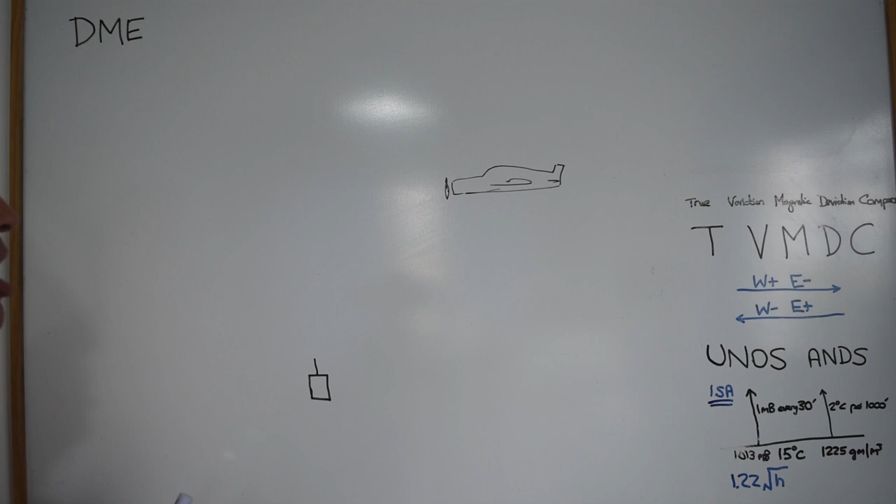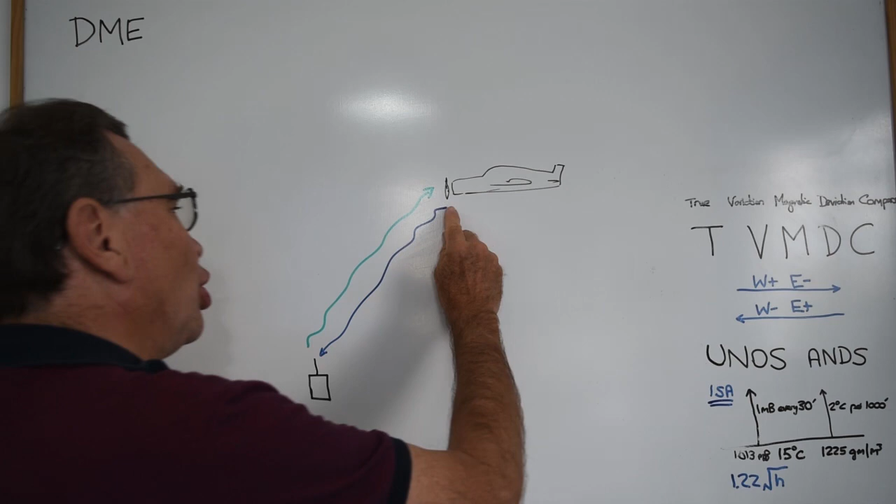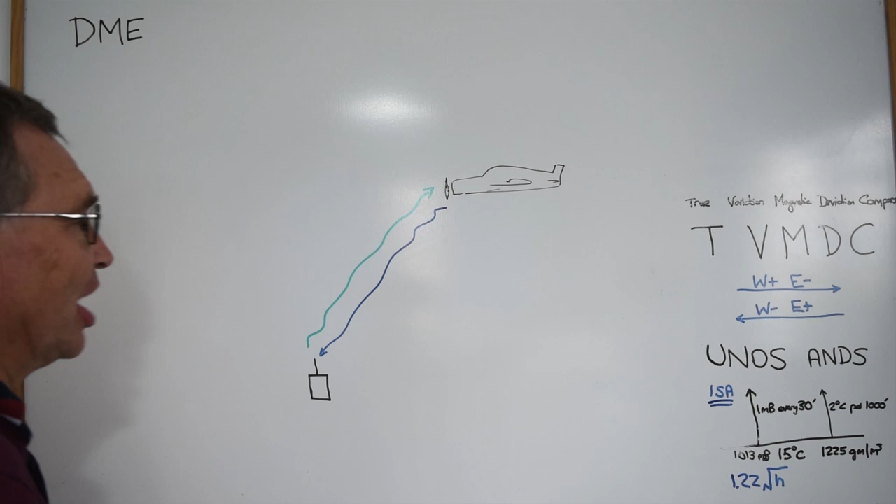So what we basically have is our aeroplane with some sort of ground station. The aircraft transmits a pulse to the ground station that the ground station receives, and it sends back a corresponding pulse to the aircraft. Depending on how long it took for this to go all the way to here and all the way back, we can then work out with the box of electronics in the plane how far away the plane is from this aerial.

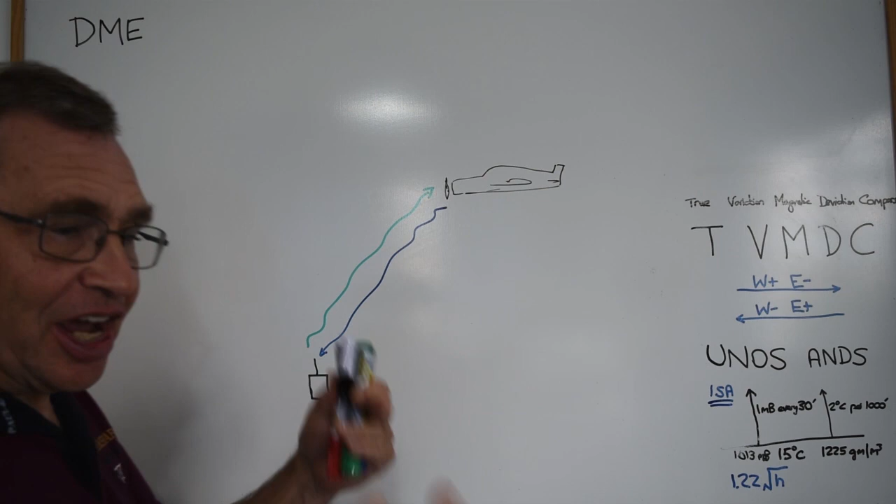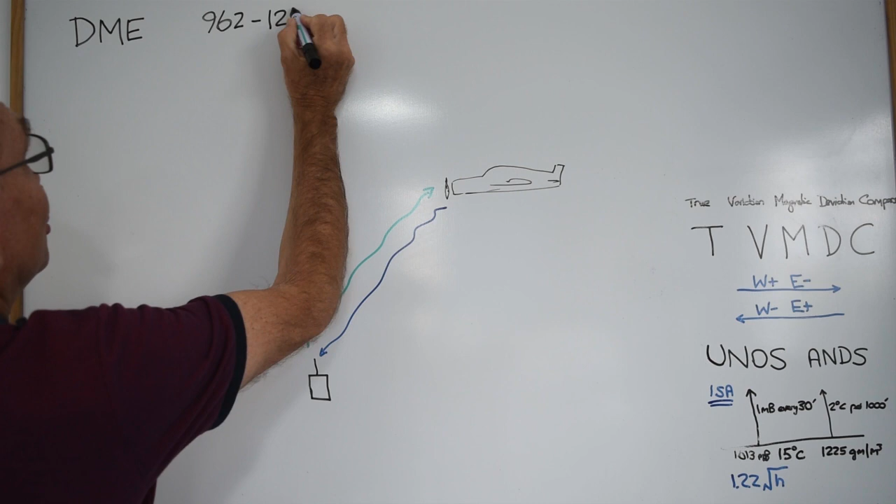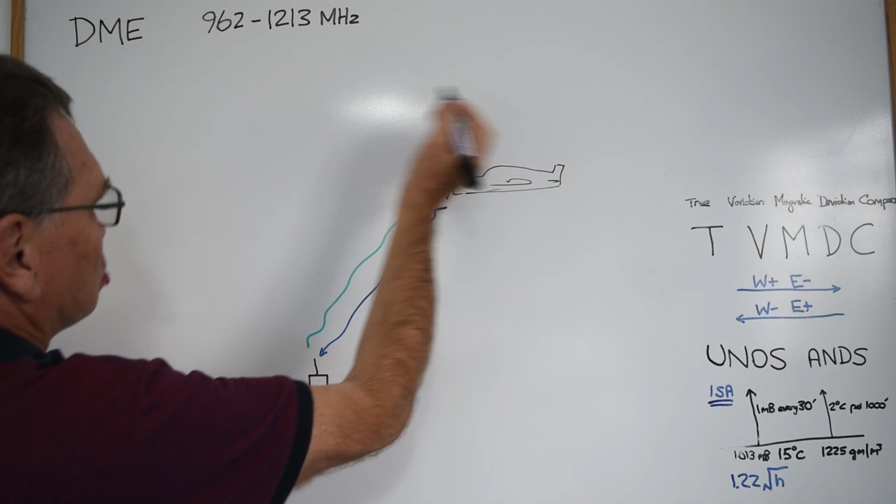Now, DME works in the UHF band, not the VHF band. The UHF is the next one above VHF, and it works in the range of 962 to 1213 megahertz with 1 megahertz spacing. That gives about 250 frequencies available.

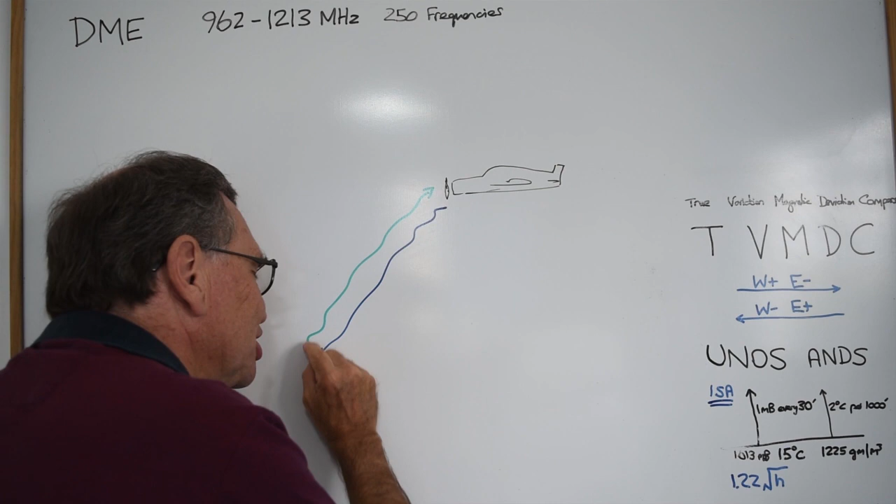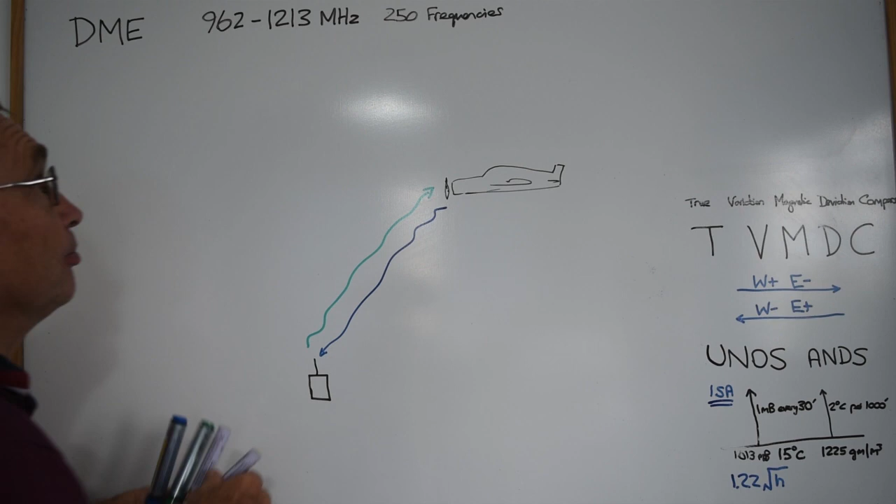Now the signal coming down and the signal going back up are on two different frequencies. So of this 250 frequencies, we've actually got 126 channels available to us, because each channel uses two frequencies.

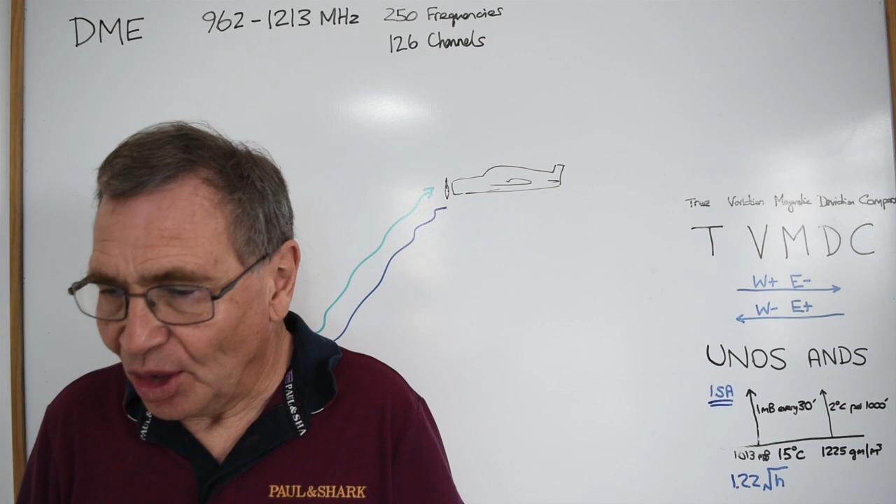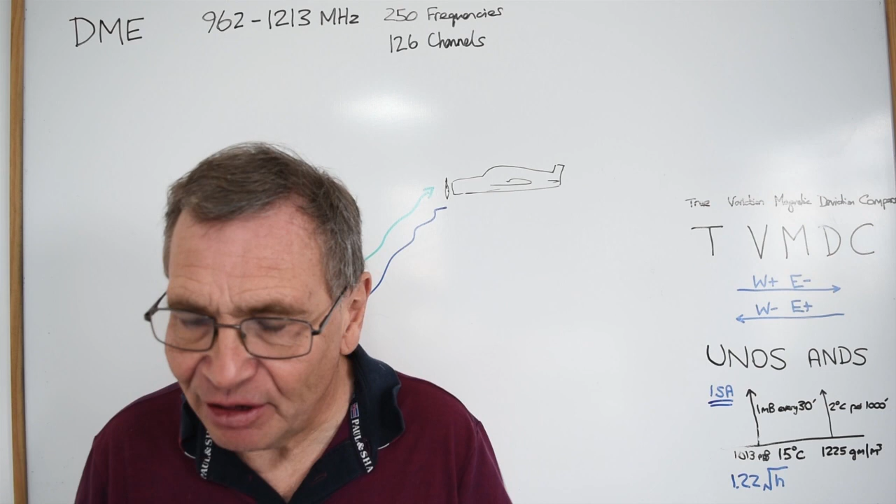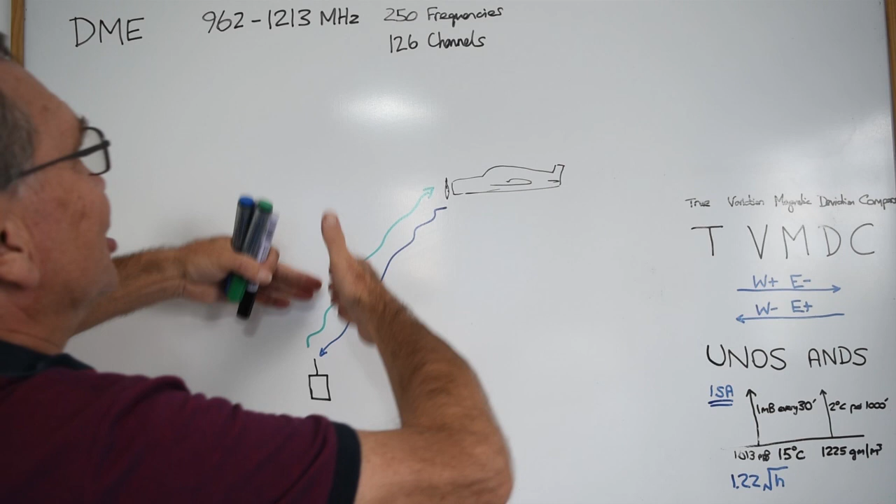Now, the great thing is that we don't need to know what all of these channels and frequencies are, because they're paired with VOR frequencies, because all DMEs are generally co-located with a VOR station. So by selecting the VOR frequency in your VOR receiver, we automatically select the appropriate DME channel, and the DME channel, of course, knows which of the two frequencies it's going to use. So this is really, really nice and simple from an aviation perspective.

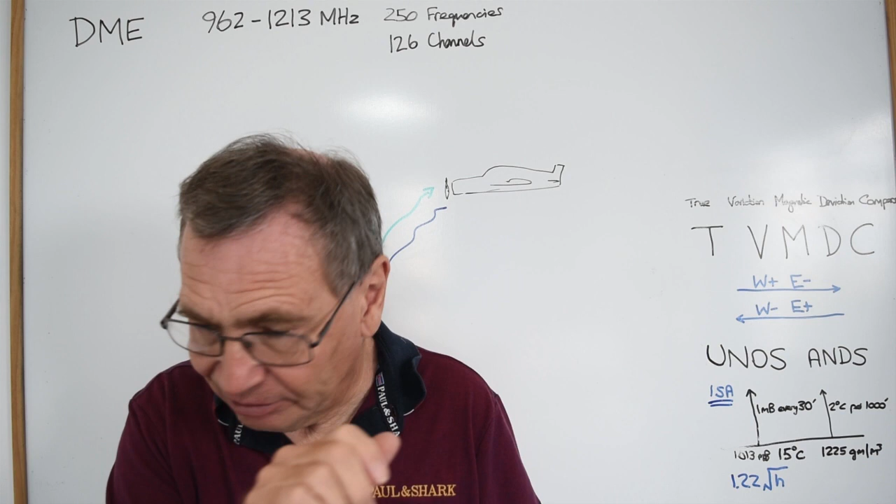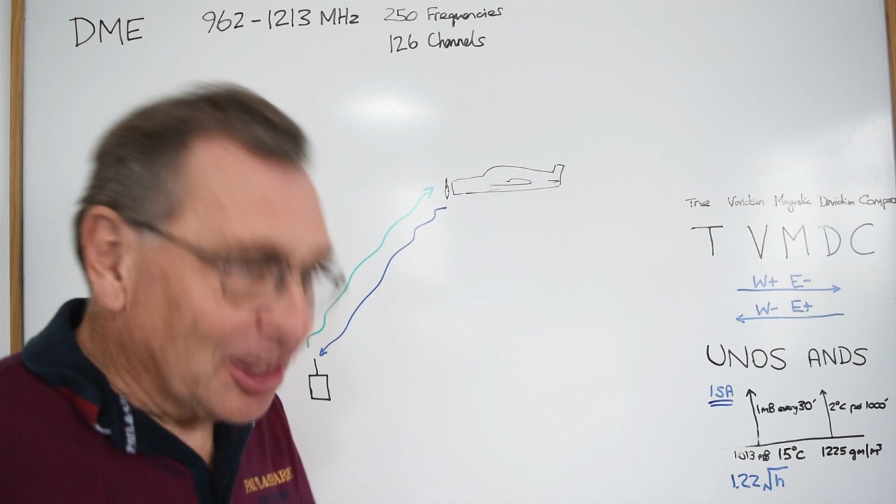But don't forget that when we're selecting the VOR frequency, although we're selecting the DME frequency, that isn't the frequency the DME operates off. The DME has its own unique set of frequencies in the UHF waveband.

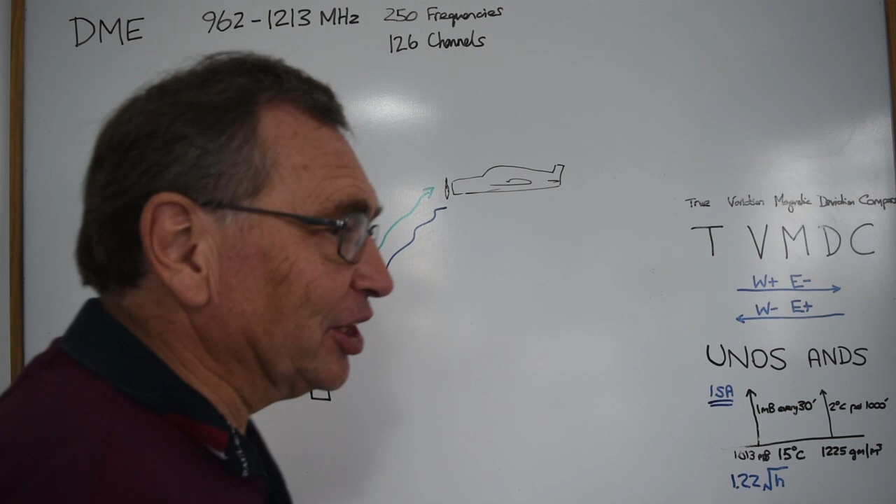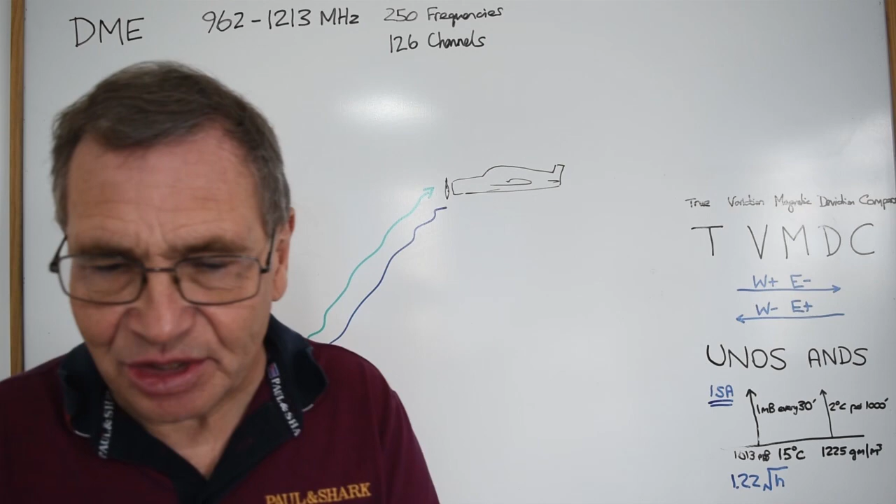Now, the other thing to not be confused about is that anything that receives a radio signal and sends a signal back is called a transponder. So DME is working around a transponder. But although this is working exactly the same as the SSR radar transponder, in that it receives a pulse and sends out another pulse, this transponder, although it's called a transponder, is working in a completely different way to the radar transponder, although it's basically doing the same job. So when you hear of DME transponder, it is a different type of transponder to the SSR transponder that we're all familiar with.

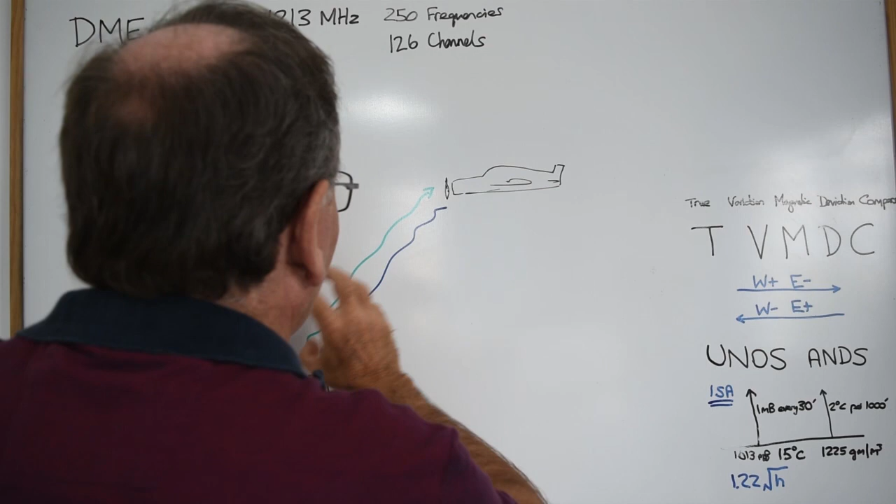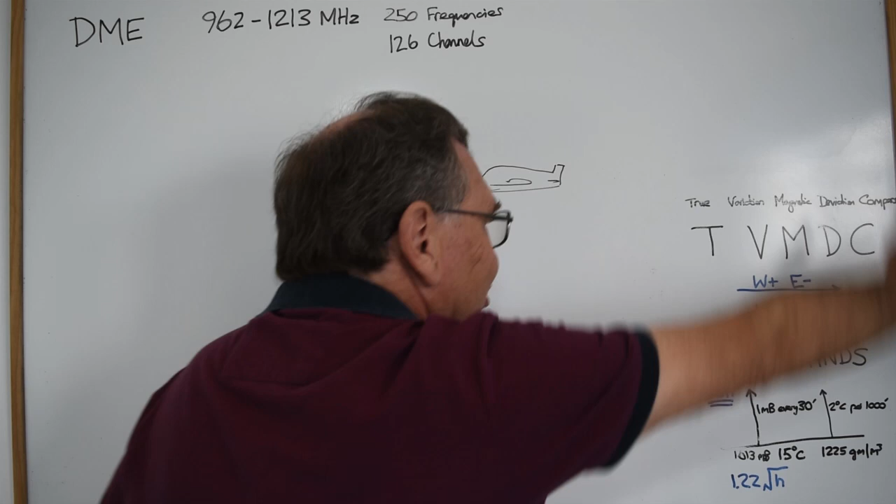So a few technical things: you could probably imagine this scenario where we've got many planes operating. They're all sending out these interrogation pulses - I need to know how far away I am - and the DME transponder sends out another pulse as soon as it gets this one. You can then measure the time it takes. But you've probably already spotted the flaw in the design, in that it can't be quite that straightforward, because when we send out this return pulse, all the aircraft using this same DME are all going to get the same return pulse, and they'll get all these return pulses mixed up. So life is not quite this straightforward.

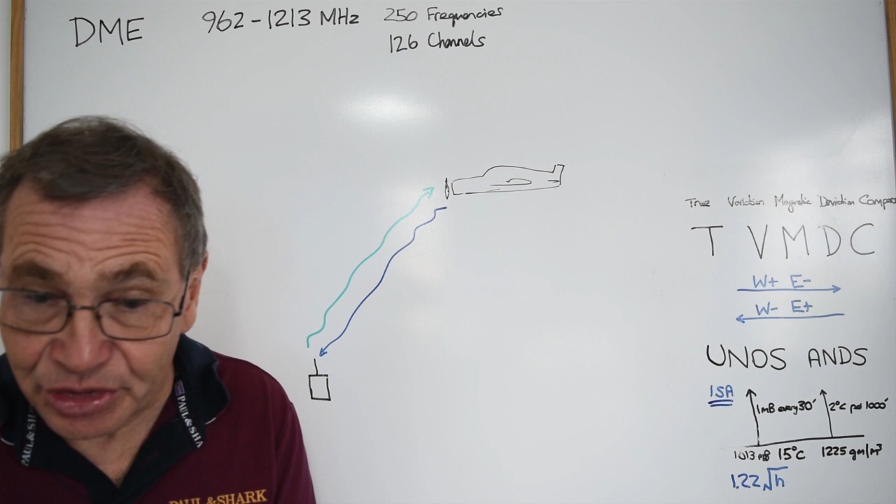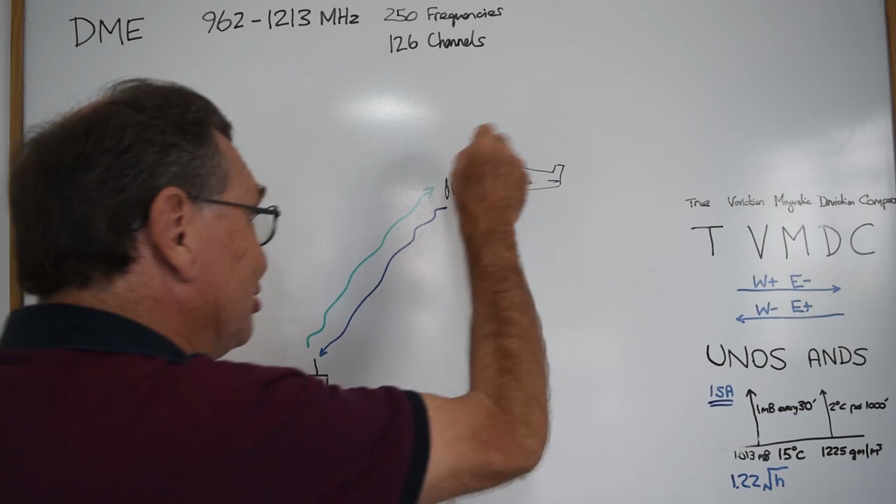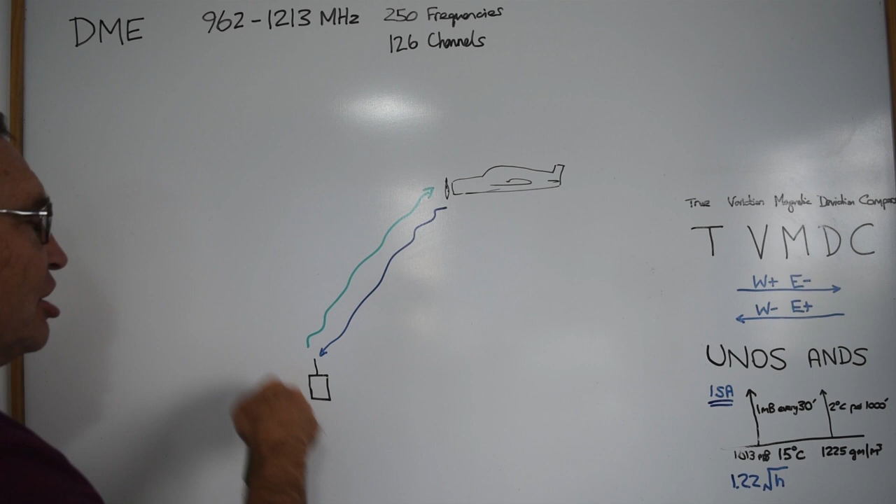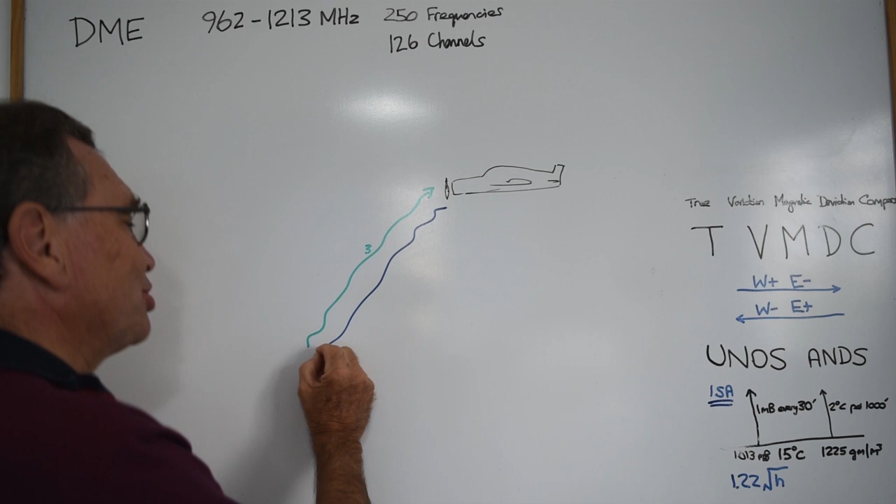What actually happens is that the aircraft initially communicates with the DME by sending out a signal that says, hi, I want to use you. The DME processes this information and says, okay, you are plane number 3, or whatever. Once it's been assigned its own unique number, the plane says, okay, I'm plane number 3, and the transponder replies back with, okay, plane number 3, here's your pulse back. So each aircraft is allocated its unique number, and each aircraft has its own unique interrogating pulse and its own unique return pulse, so they don't all get mixed up.

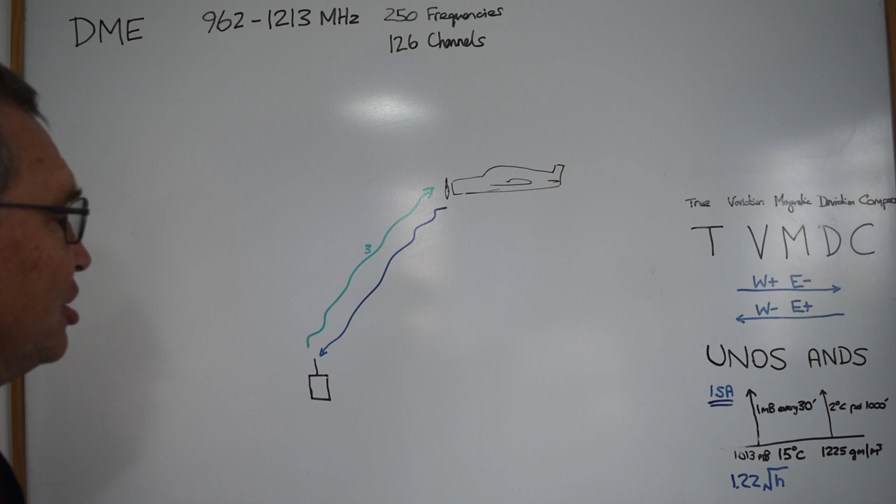Each DME can handle about 100 aircraft before they become what's called saturated. In other words, there's a finite number of aircraft that they can physically reply back to.

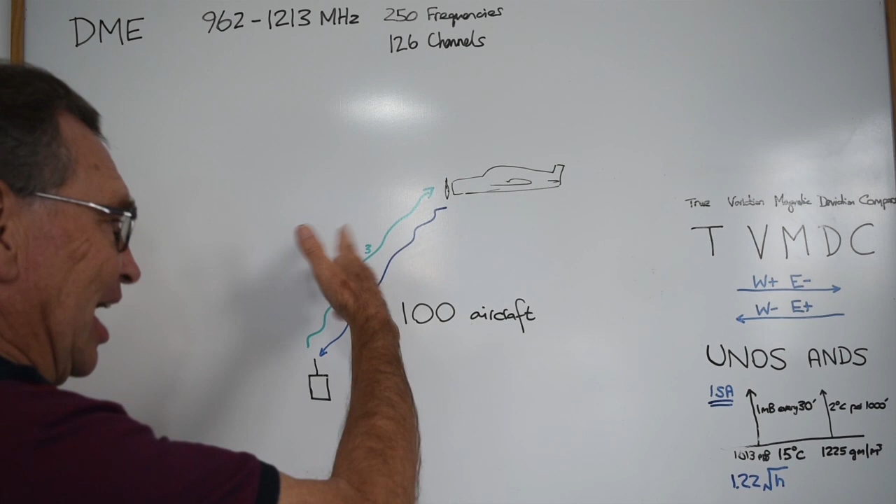And the way they choose these 100 aircraft is very simple. They just work on the fact of the 100 strongest signals that they're receiving from the aircraft. So if it's approaching saturation and another plane comes along that happens to be closer or higher or in better range of the ground station, the ground station will throw you off and allocate your number to somebody else.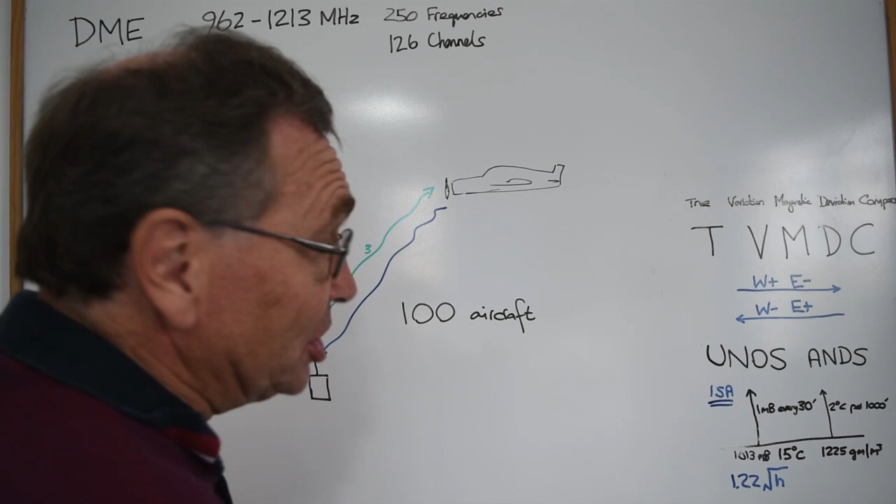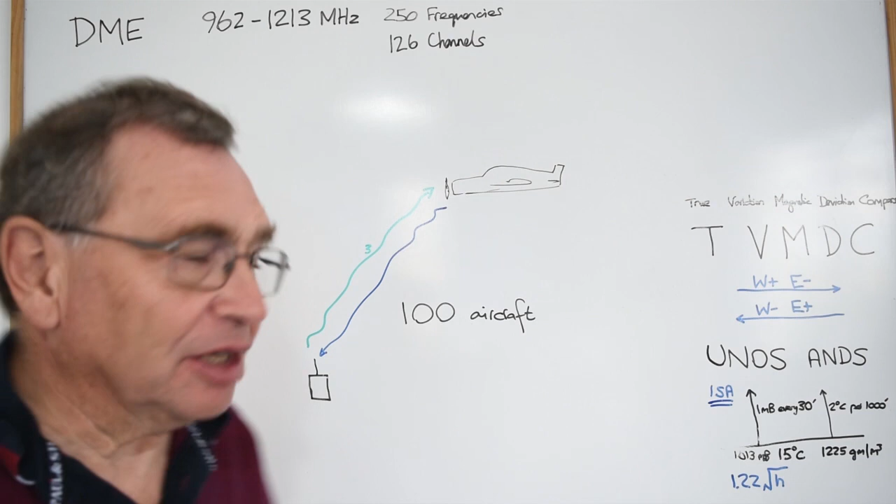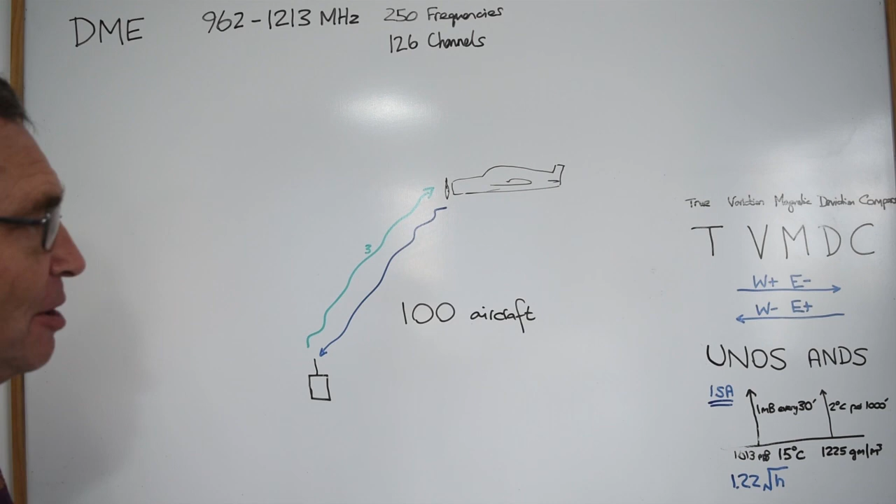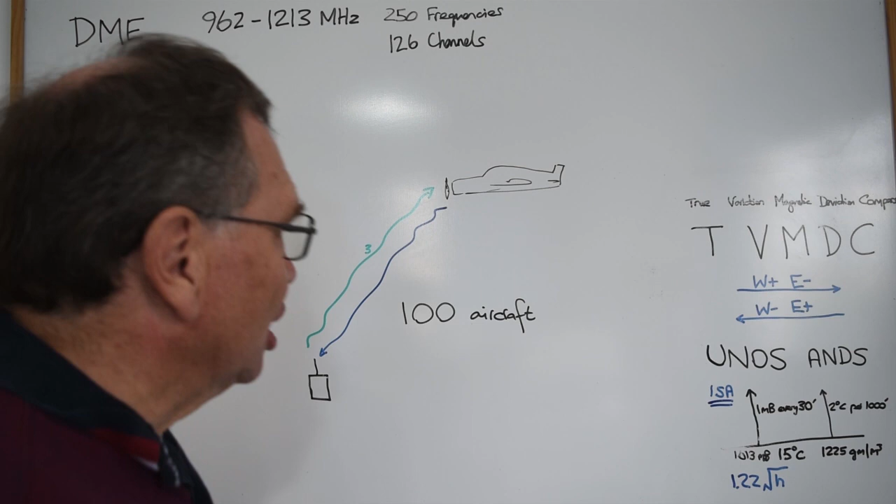Now, probably about 20 or 25 years ago, there were quite a few DMEs in the UK that were actually saturated. The London DME was extremely oversaturated, and anything more than about 20 miles away from the London DME, you couldn't actually use it, just because it was completely saturated. But nowadays, because a lot of people have switched to GPS, there isn't this same DME requirement, and I've never come across scenarios in recent history where you've got this saturation of DMEs and can't actually use them.

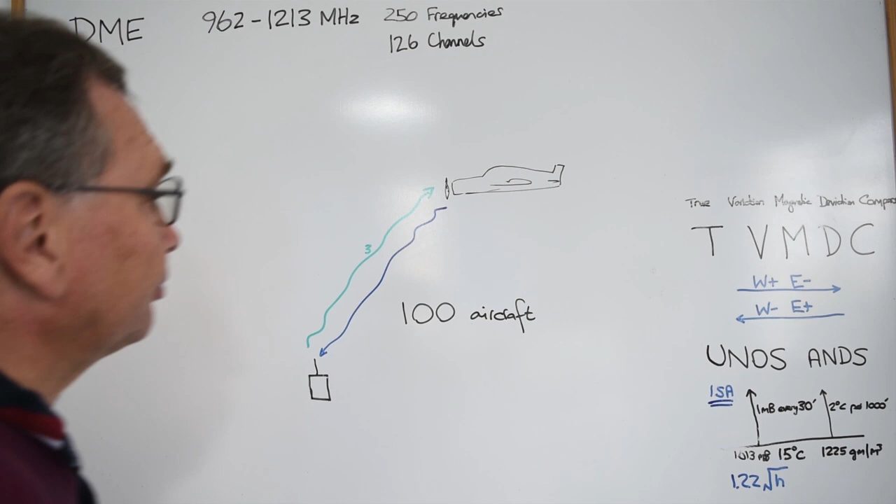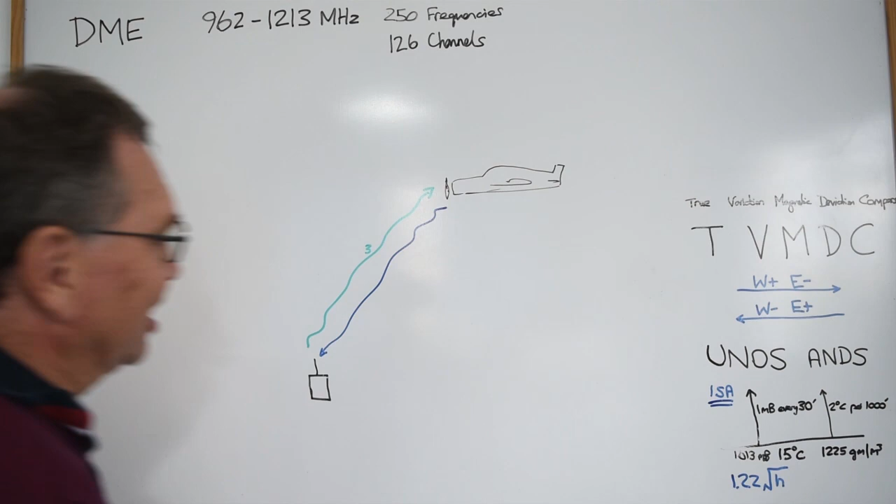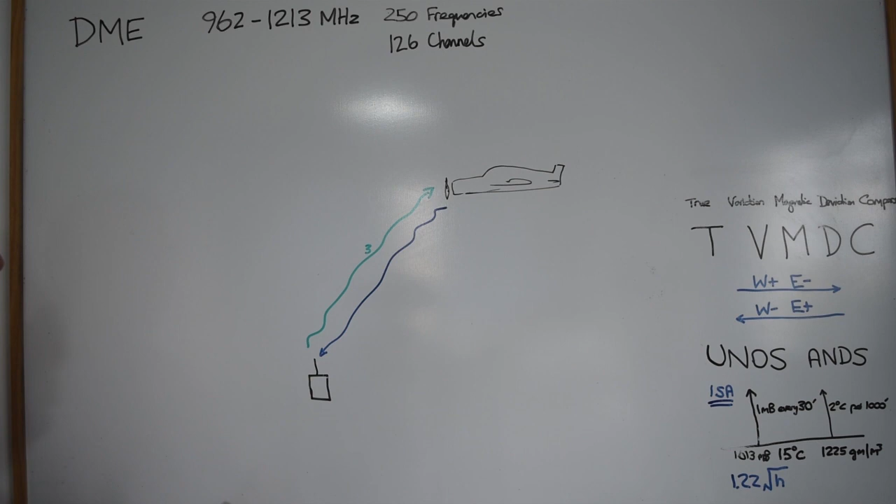So one of the things to notice is that the DME is not actually telling you how far away ground-wise you are from the station, because you're sending this pulse and it's sending you this pulse back. So what you finish up with is the distance you are away from the actual aerial of the station, your aerial from its aerial, and we call this the slant distance.

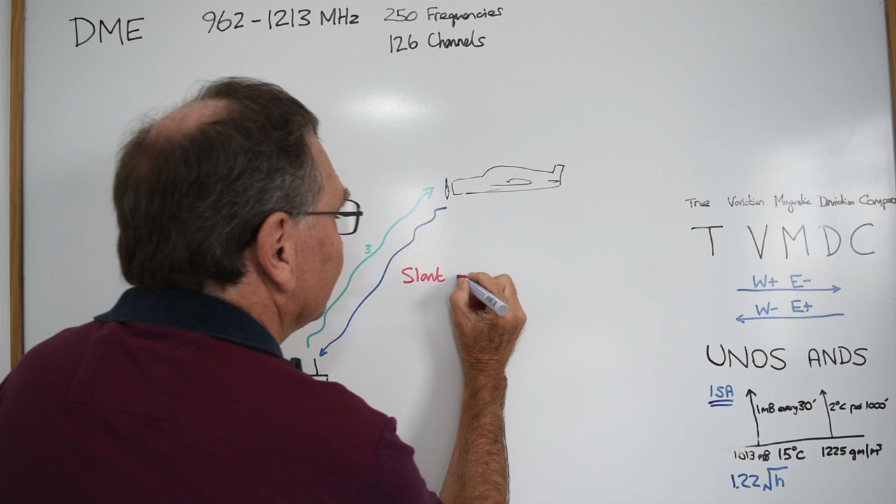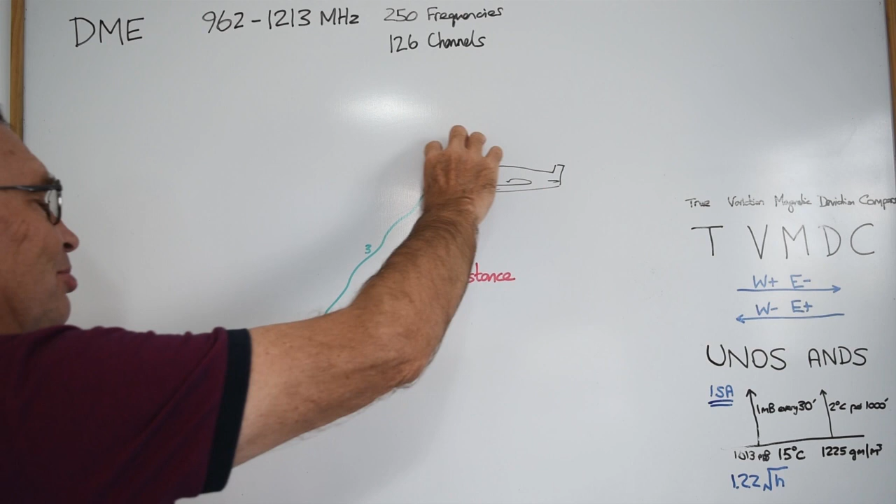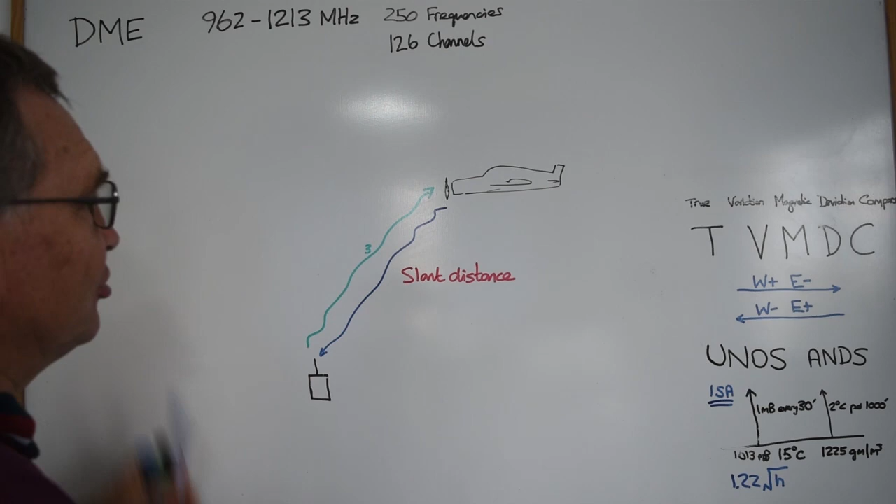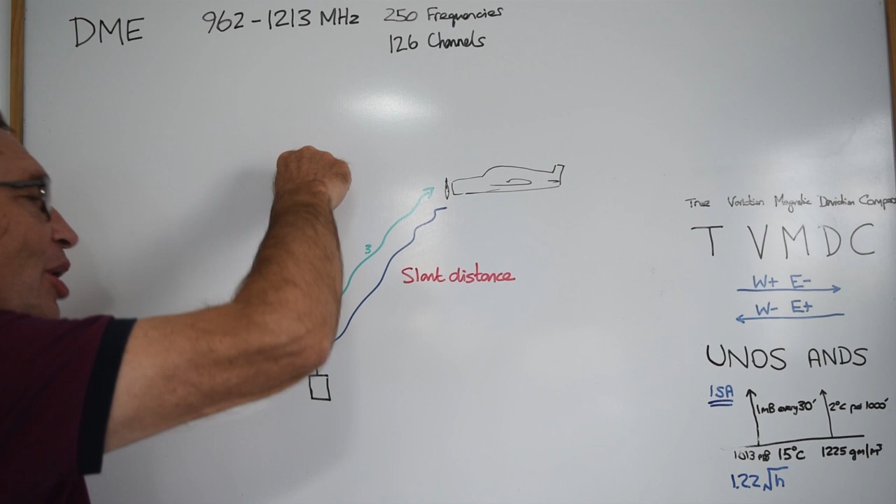So even if you fly straight over the top of the DME and you're right here over the top of the DME station, and you're sort of like 5,000 to 6,000 feet above it, and you're right on top of it, well, you're still actually a nautical mile away, aren't you? Because you're still, you know, even when you're actually directly above it, you're still 1 nautical mile away, because you're 1 nautical mile in the air.

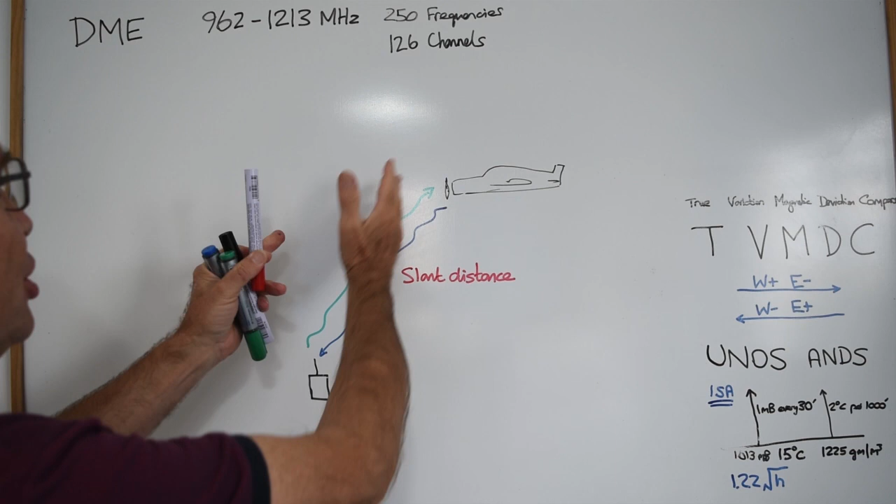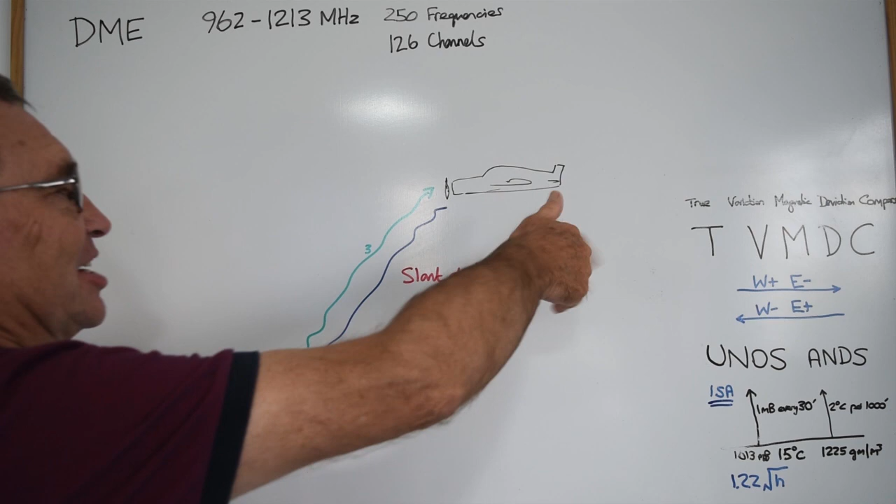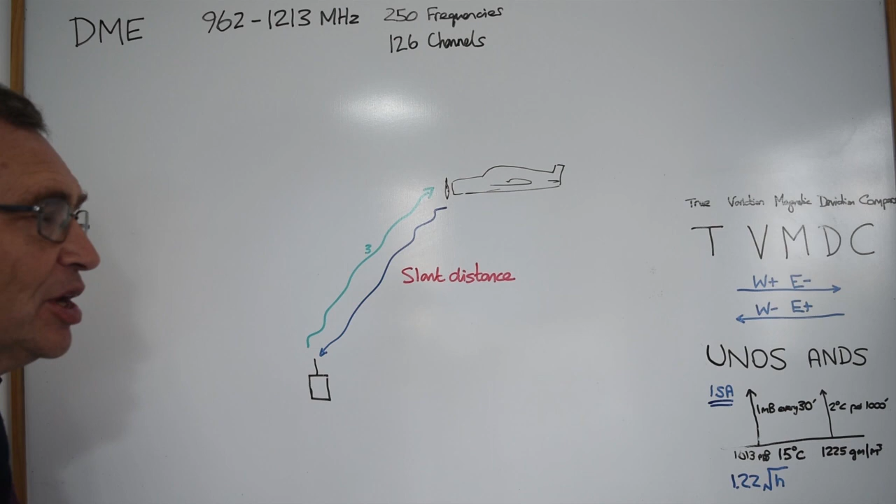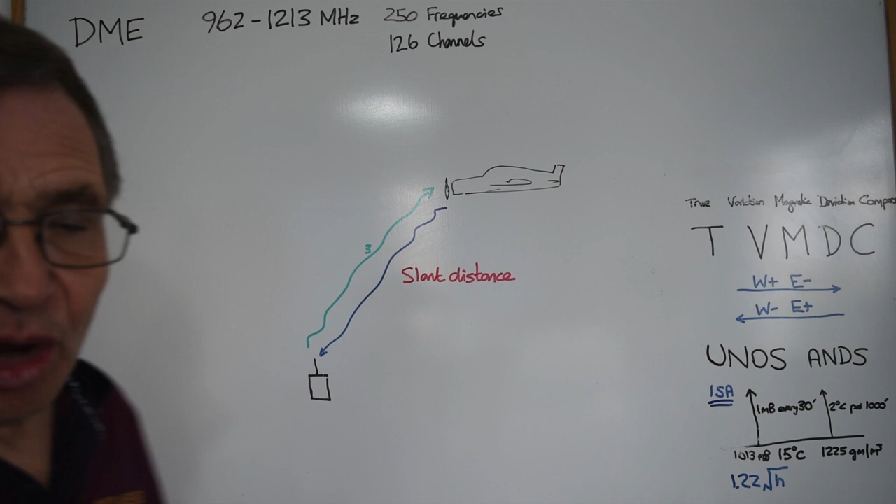So you can see that unlike VORs and NDB ADF combinations, there's no cone of confusion when you're overhead. There isn't this passage as you get immediately over the top where the needle suddenly has to flick from straight ahead to straight behind. A DME will always be working without any confusion, because it's always measuring your distance, no matter where you are relative to the DME.

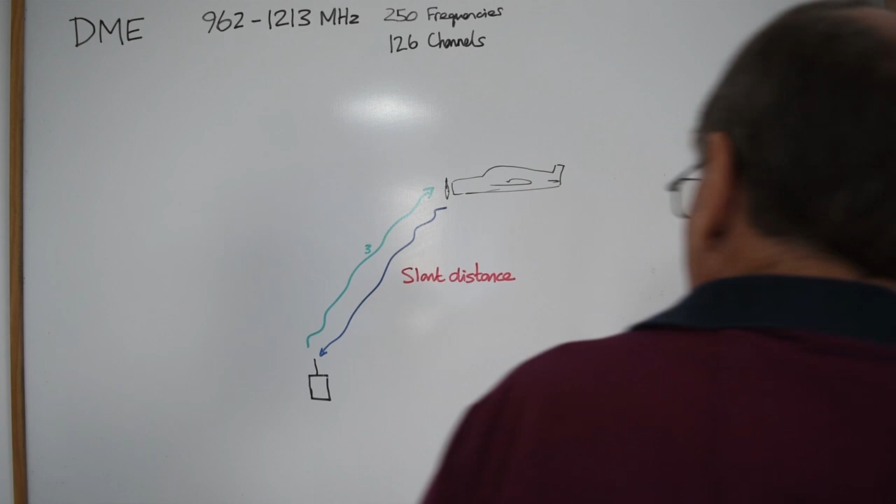So how do we actually use the DME in the cockpit? Well, there's various DME equipment, but normally you've got something very similar to any of the normal equipment in the stack. The only difference is, of course, that we know that the frequency is automatically paired with VOR, so we don't have a means of changing the frequency.

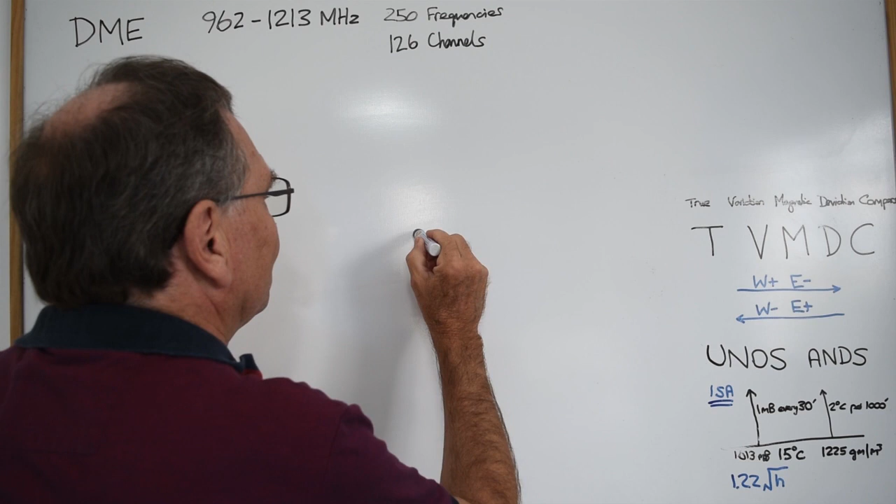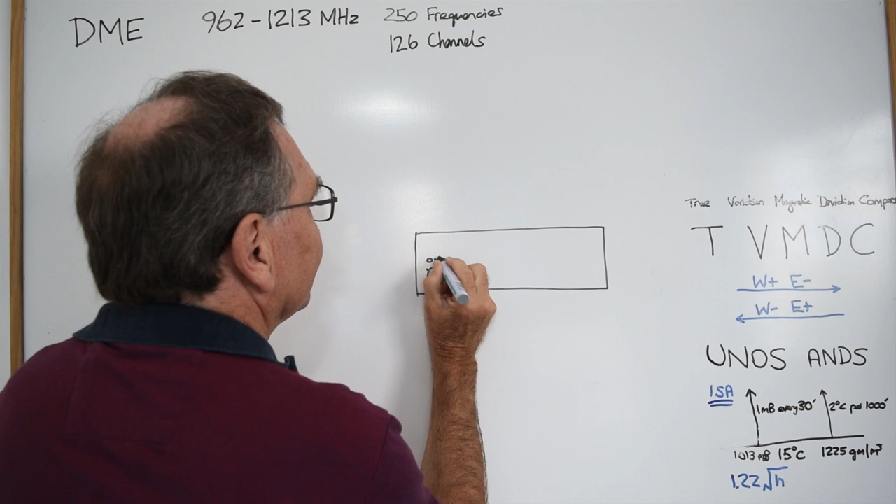So your DME box will probably have an on-off, and it might have some sort of volume control, normally all combined into one simple button.

And just like using a VOR, what you do is you look at your COM panel along the top, your intercom COM panel. The top row will probably say phones, this will probably say speaker or whatever. And you look along here until you see the button that says DME. You press the DME button and you listen for the DME ident.

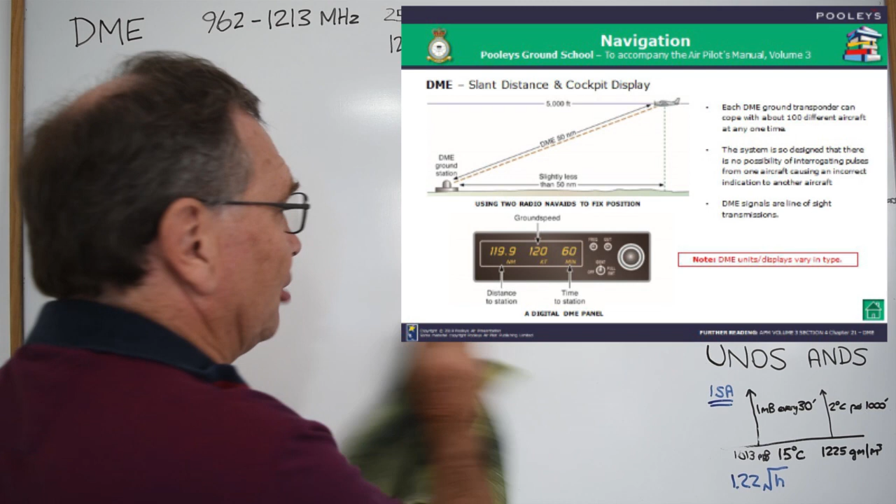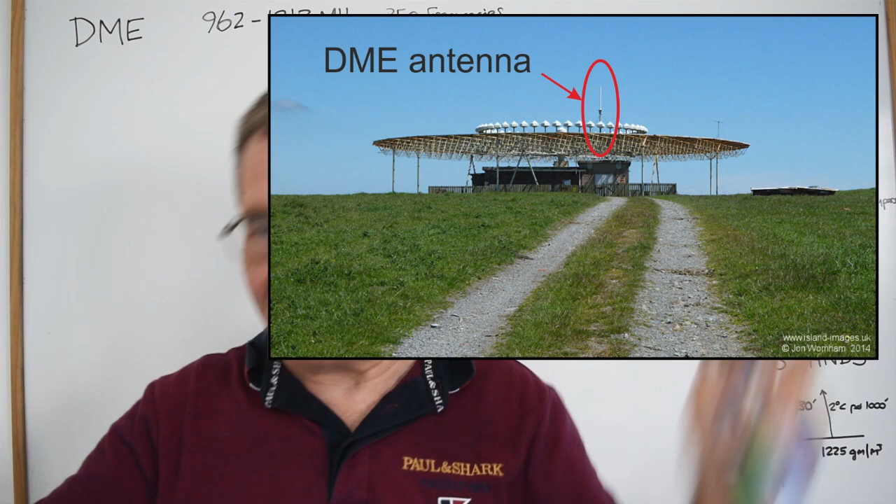So how do you tell where the DMEs are on the ground? Well, the DMEs are normally co-located with the VORs. You normally find this great big huge VOR - and VORs are massive, the ground station for a VOR, some of them are like 30, 40 foot in diameter, just ginormous constructions of aerials and things sticking up. But the DME is just a small box with an aerial sticking up out the top of it.

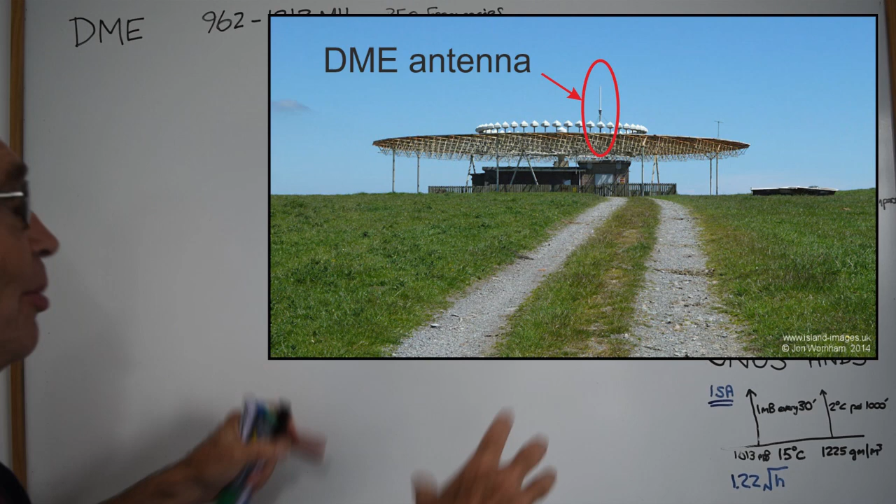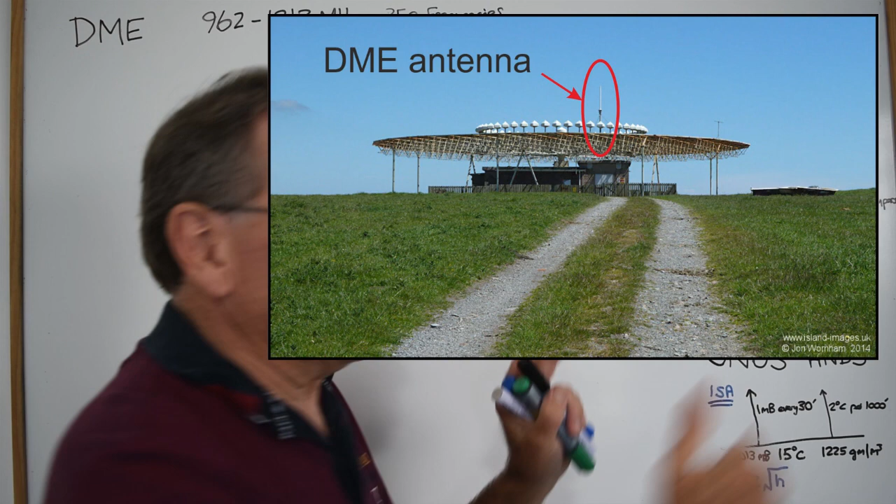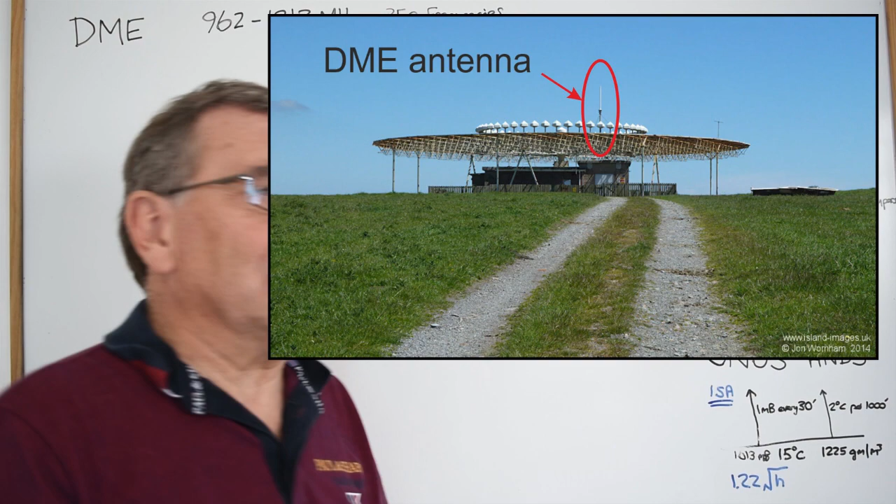So generally you find that sometimes just off to one side of the VOR, built into the VOR itself, amongst all the structures of aerials, you've got a little aerial sticking up, or quite often just off to one side, only 4 or 5 metres away, you'll have another little building or shed, which has also got all the electronics for the DME in it, and on top of this is another aerial, and that's your DME aerial.

And you can tell them because on the chart you'll have a VOR which might say something like Charlie Papa Tango 114.35, and if it's a co-located VOR DME, in other words, if it's got a DME built into this thing, it has a box around it, looks like this - a rectangle around it - and it also says underneath here DME, which means it's also got the distance measuring equipment in.

So that's how you tell this hexagon, which is the VOR, and this extra rectangle all the way around shows you that it's a DME, and it also says DME. Of course, there's not a separate DME frequency, because although it's on 114.35 built into the electronics of your DME receiver, it knows that 114.35 is whatever channel that is, and it knows what frequency that channel corresponds to, to actually use the DME.

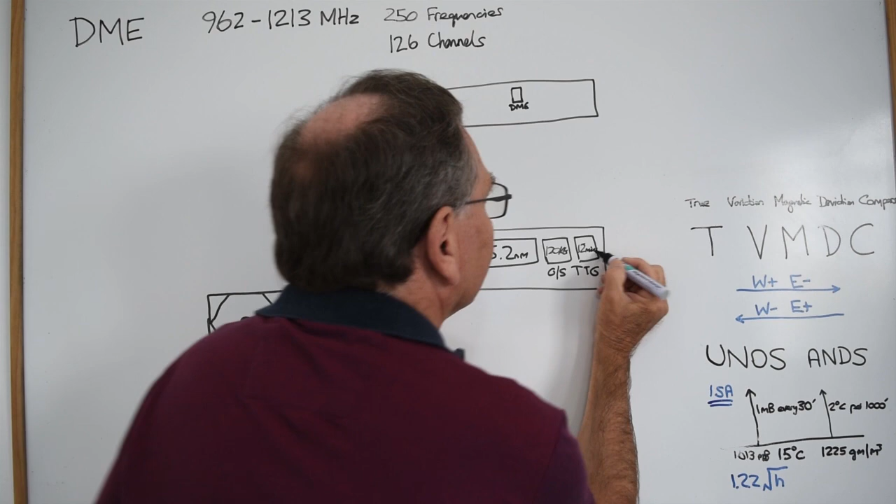As you're approaching the DME, obviously this will be going down, and this will be going down. So a nice thing is that if you're routing towards a DME and air traffic control asks you for an estimate, you can just quickly look at your time to go, and immediately tell how far you've got to run to the DME. Now, you've got to be a little careful here, in that your ground speed and time to go only really work if you're actually going directly to the DME itself.

You can probably imagine that if you're transiting the DME, like if here's the DME and you're transiting across here, well your ground speed really isn't that useful, and your time to go really isn't that useful, because your ground speed's going to decrease, and then it will increase along this line.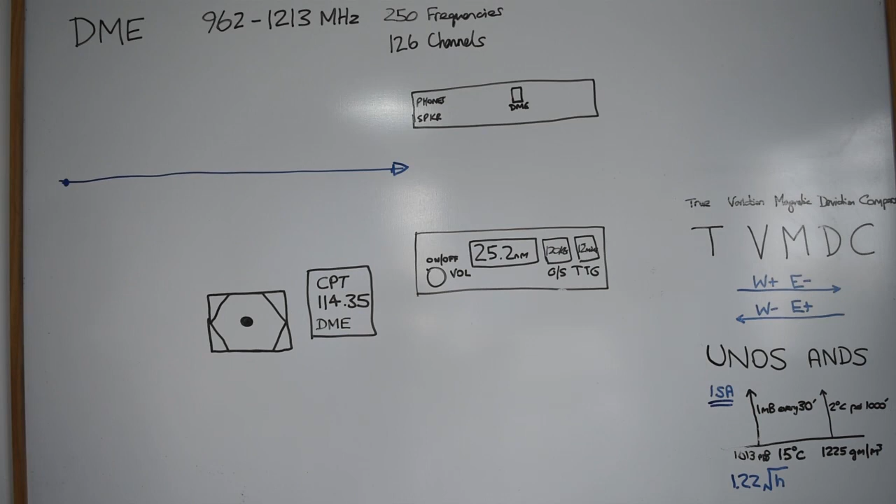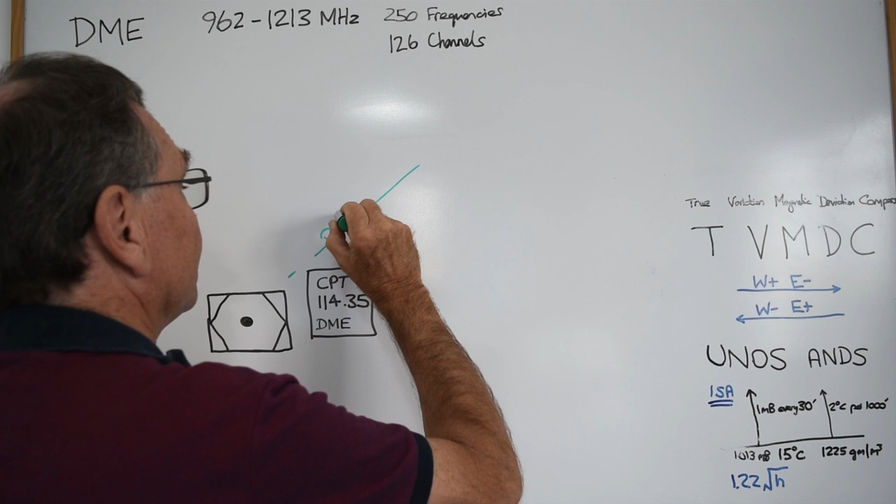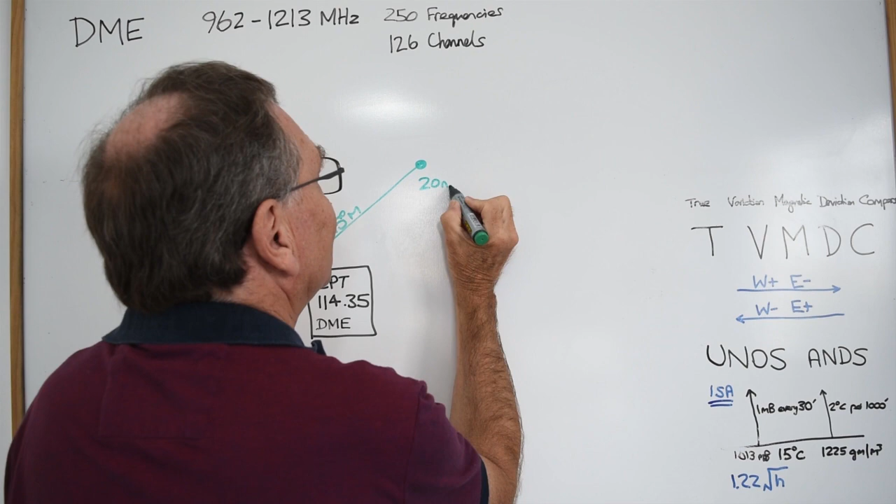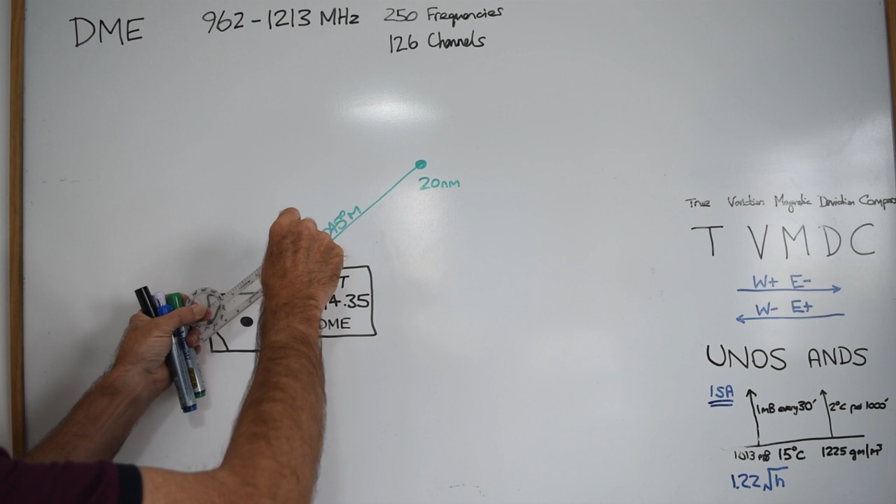So how can we use this for navigation? Well, the first really big feature of DME is that combined with the VOR, you can find where you are at any point in time. Because if we know from the VOR what radial we're on - let's say we're on the 045 radial - and we know how far away we are, let's say 20 nautical miles on the DME, then we know exactly where we are. We can physically get our protractor and measure out, align this, measure it, and say, oh, that's exactly where we are, and put a mark on the map. So they are really useful because they are a means of very quickly knowing exactly where you are.

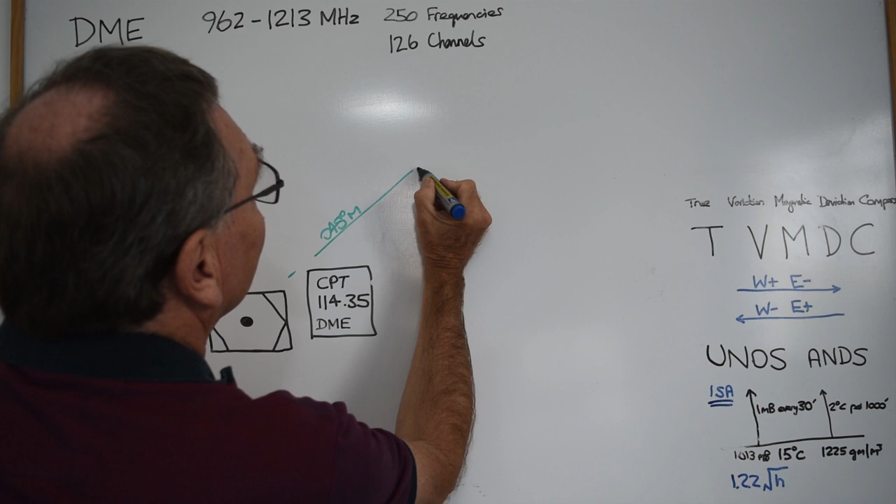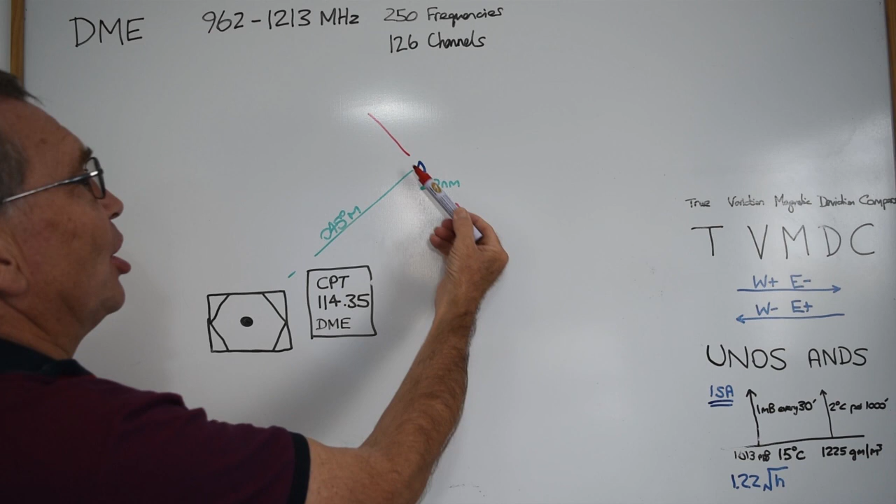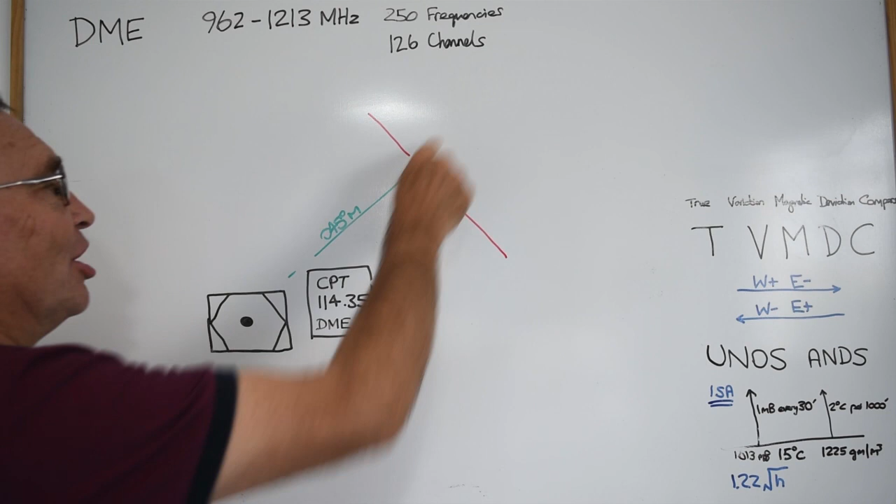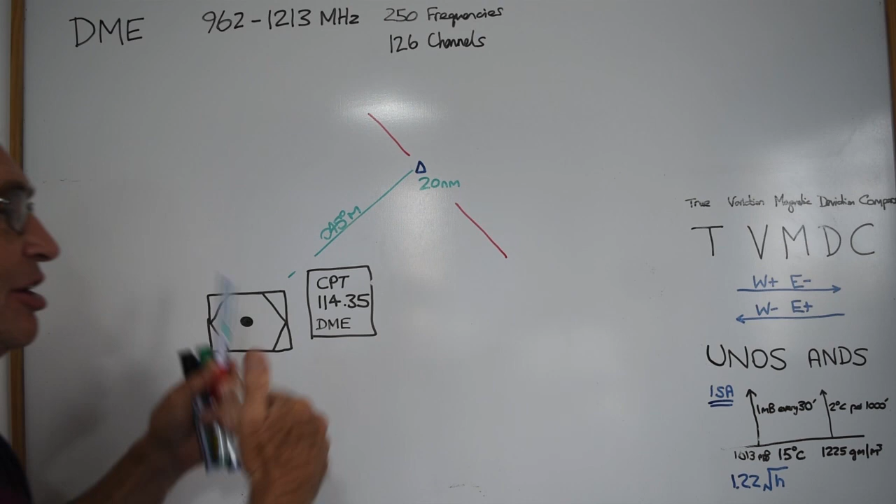And of course, we can use a DME in very much the same way for visual navigation. Even if we're not routing directly via the VORs, we can know how far away from the VOR we actually are. So for example, if instead of being here, we had this as a waypoint, then we could be monitoring where we were relative to the VOR. If we're passing up here, and when we cross the 045 radial, we could see how far away we are relative to it, and that would tell us whether or not we were here, or how far away we actually are, and we could get an idea of any errors in our navigation.

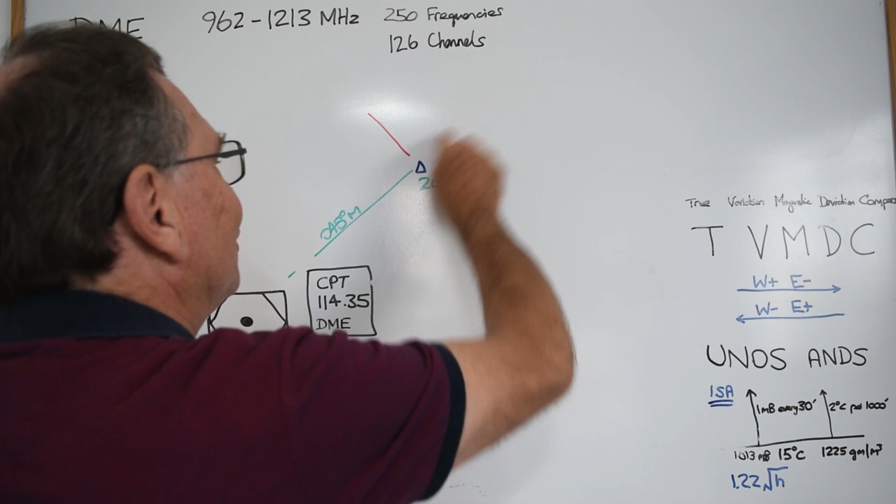You normally find it's easier to wait until your radial comes up and then quickly look at your DME and write that on your plog, and then you can work out where you are left and right - this is normally the best way of doing it from a VFR perspective. It's not normally a good idea to find your distance first, wait until the distance comes up and then work out what radial it is, because you can't visualize that on a map.

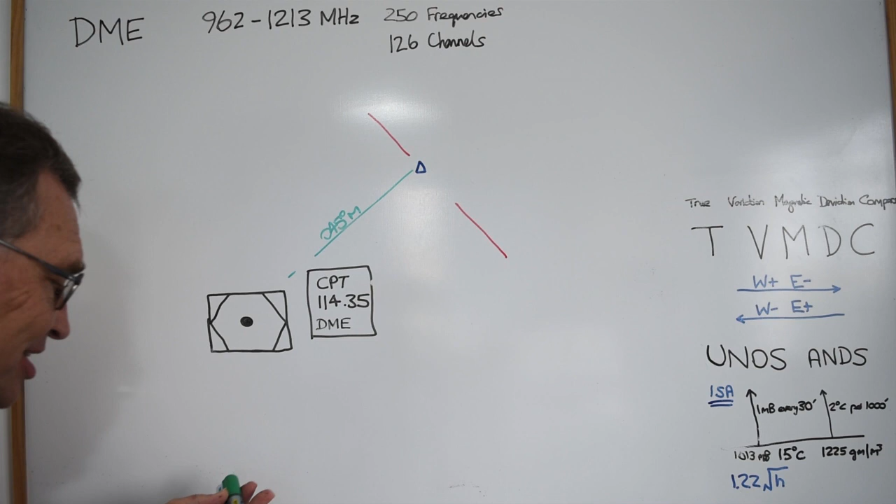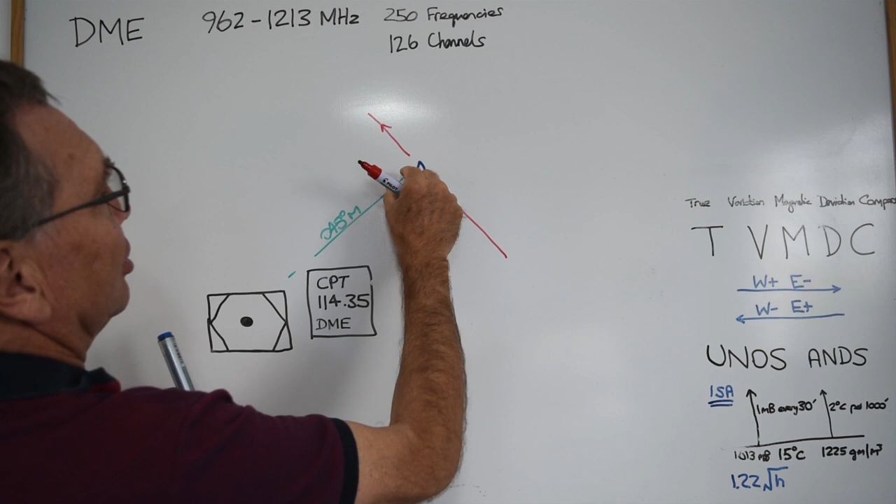But on a map you can always draw the 045 radial, wait until you cross it, pick a radial - obviously you're going to cross at roughly 90 degrees - and as you cross that radial you can quickly see how far away you are. In your head you can easily say, oh, hang on, I'm 18, this is meant to be 20 and I'm actually 18, which means my real position is here. So although I was meant to be here, my real position is here, which means you'd say, oh, if I'm a mile or two short here, that means I need to come sort of 5 degrees to the right as a course correction.

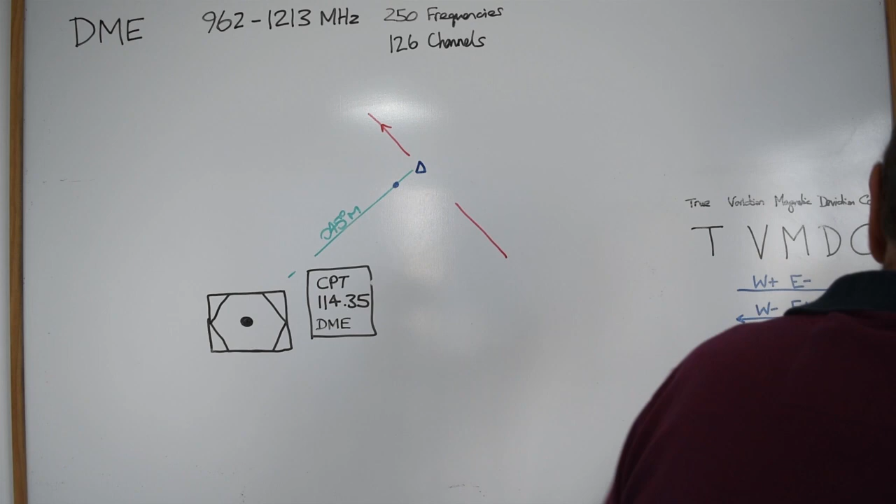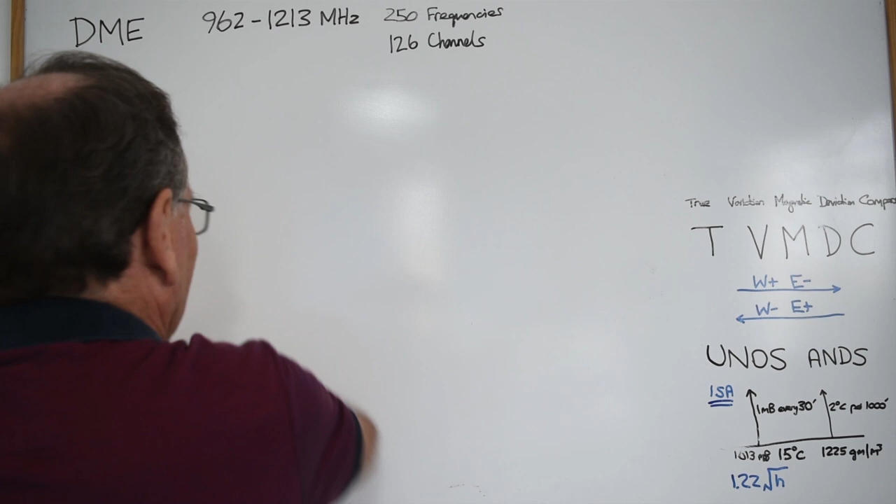So that's really how a DME works. Before we finish this, I ought to mention one last thing, which you'll come across. It's not part of the PPL syllabus, but I'll just mention it. And that's RNAV.

What RNAV is, it's a way you can create waypoints using a mixture of VOR radials and DME combinations. In other words, you can pick any spot and measure what radial it is from the nearest VOR and how far away it is from the VOR, and you can express where that is by the VOR radial and the corresponding DME from that VOR. And we call that an RNAV waypoint.

And there's quite a lot of equipment and technology in planes nowadays where you can actually set these points up as physical waypoints you can fly to. In other words, we don't have to fly to a physical VOR DME anymore. What happens is that we can set up these RNAV waypoints based on VOR DME, and we can fly to and from these waypoints, which means we don't have this danger of all the aircraft converging on top of a VOR station.